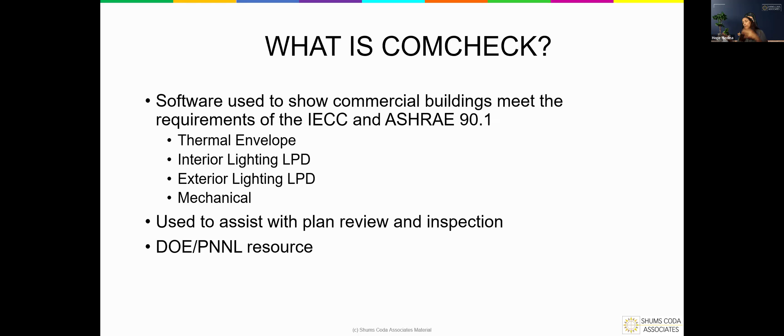If our codes are not more energy efficient with each edition, we have the possibility that this particular resource actually goes away for us. So it is important to keep in mind, we have this, it's a great resource to use. Now let's see all the fun and excitement that comes with it. So I don't know if you have ever had the opportunity to go on to COMcheck and just play around in it and see how the software itself works.

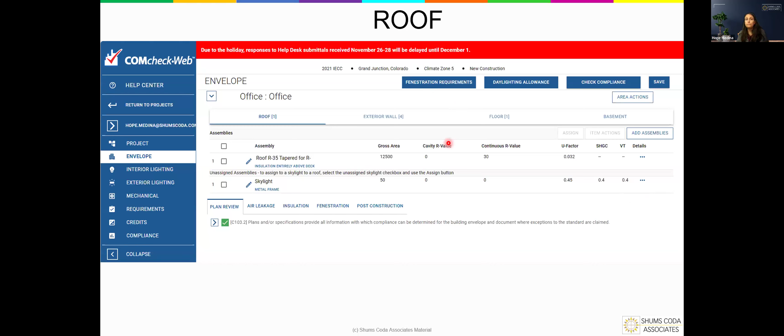So when you are building this, the components that you see on the screen here don't differ from what's required with 90.1 and what's required in the IECC in this particular instance. So here is what our roof components are that are going into the report. And if we come here, here is our exterior walls. It's telling us it's going to be a metal frame, 16 inches on center. There's 6,000 square feet gross area of it. It's going to contain an R20 cavity and a 7.5 continuous.

And then you'll notice that right below it, it has a window, but it has this notation right here where it's a little arrow. And what that arrow means is in the software itself, you assigned that window to be located in that exterior wall. And so the windows happen to be vinyl fiberglass frame. It's got 384 gross area. It's got a U factor of 0.32, solar heat gain of 0.25, visible transmittance of 0.4, and a projection factor of 0.2. This is one of those times that, when we talk about projection factor, the information can be placed here in the report.

And the same can be said for the entrance door. This is an entrance door that's glazing. It's over 50%. So it has this input, whereas the door below it is not a glazing fenestration door. It's an opaque door. And so it has different criteria that it's going to input there.

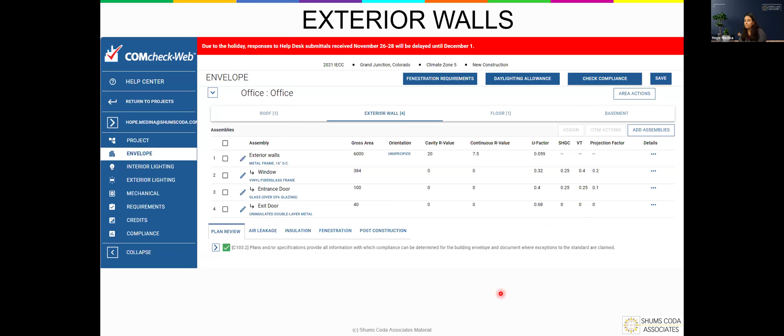All right, then we have our floor. Our floor happens to be slab on grade. It's an unheated floor. In this particular instance, you'll notice it has gross area / slab perimeter, because when we do our slab edge insulation, it's not done by the gross area. It's done by the linear feet, and the slab perimeter is how they're trying to capture that linear feet concept. And then we have a depth of 3 feet on that.

Now, when everything is culminated with what is put into the software, this is what our report looks like. So as you can see, here's our roof, how it was labeled. If we went back and looked at how it was entered into the software, it says R35 tapered for an R30 average. Wonderful. That makes it very clear. And then to ensure that it's correct, where the continuous insulation R value is, it specifies R30, which is what it had to be for that area weighted average. It wouldn't show an R35 because that's not the average they're trying to get to. That's their starting off point.

Then we have our floor. So we know that we have our R10 continuous insulation. Our 3 feet is located over on this side. Our exterior walls, we have that R20 cavity, 7.5 continuous. This is what our design gives us.

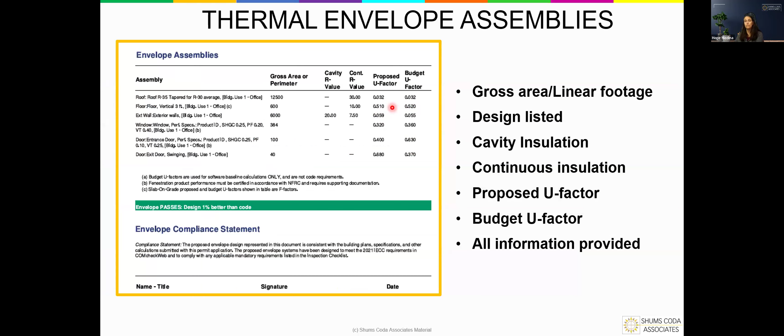All right, so jumping back to our interior lighting fixtures. In this particular instance, it's a lot of fun trying to get this to work. But you go in, you talk about your office. You say, this is what we have. You get to put in the software the area part. You're going to say, oh, it was 12,500. And then it tells you what your wattage per square foot allowance is out of the table.

So because in this option, it's the building area, it's an office, utilizing the percentages here, the 12,500 multiplied by the 0.64. In the space by space option, it says that you are allowed 7,625. If you're using the building area method, it's saying that you have the ability to go all the way up to 8,000.

Now, if we look at this lower part right here, we're saying that the office is a completely open office, so it's not broken up by rooms or anything of that nature. And so the space is 12,500. It says the lighting power density is a 0.61. And then these are the lights that are going to go into that space. So this is like the overarching space, and then you start talking about the different types of lights that are going into that space.

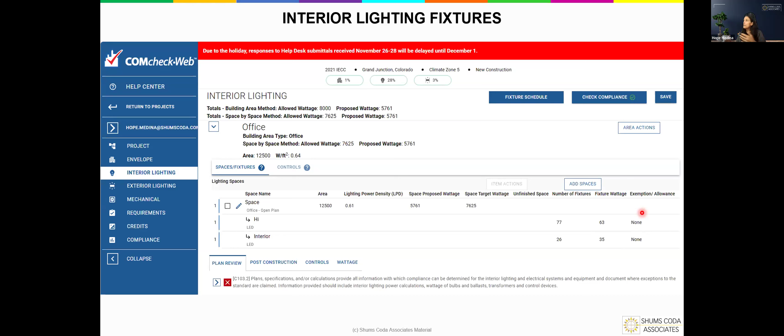And the high fixtures have a wattage of 63. The interior has a wattage of 35. And then there's a portion that you get to click on that says, is this an exemption? Because there are some exemptions that are permitted, such as maybe you have lighting highlighting the national flag. That's exempt from the requirements, or artwork. That lighting is exempt from having to be included in lighting power density. So there's some exemptions that you get to click on and utilize.

So our high lighting is 77 fixtures, and the watts for each of those 77 fixtures is 63. So when we multiply that, that gives us the 4,851. And our interior lighting, 26 of them, has a wattage of 35. That gives us 910. So our total is 5,761. So this would pass because this number is less than the maximum amount of lighting power density we were permitted by the code.

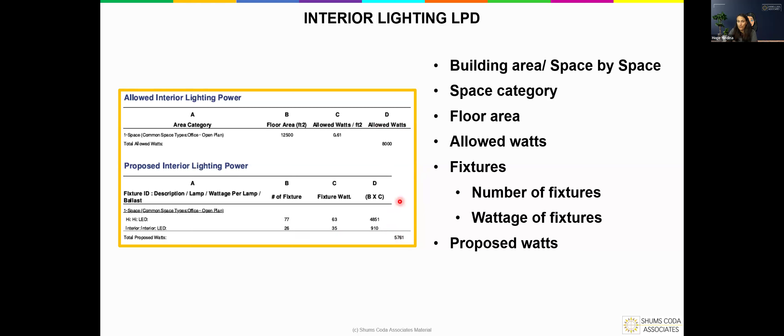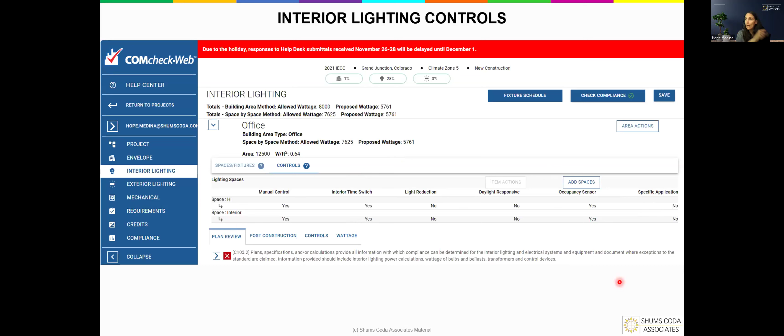Now you'll notice all the software says is yes, it's there, or no, it's not included in the design. The COMcheck report is not saying that it meets the criteria of the energy code, because we're not specific enough that this light is located in this space under this condition, so it needs to have this control. COMcheck can't do that, but below your allowed wattage and proposed wattage, it has your proposed interior lighting controls. For these two fixtures, these are the lighting controls that could be included.

So this gives you an extra tool that you can take to your plans and say, okay, COMcheck says that we have these three controls that are going to be installed. And then you can look at the plans and say, yes, they have these three controls being installed, and it does work. Again, this green bar down here is about the interior lighting and not whether or not the lighting controls pass.

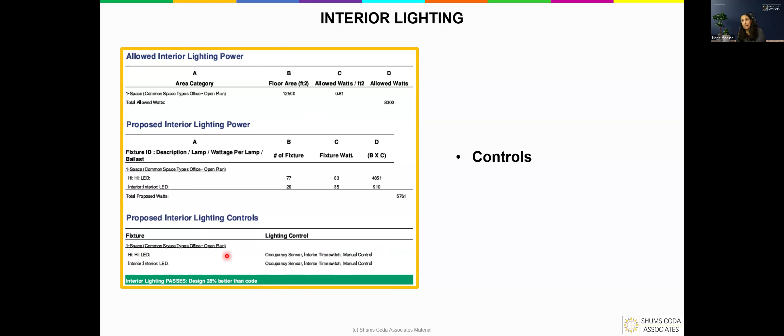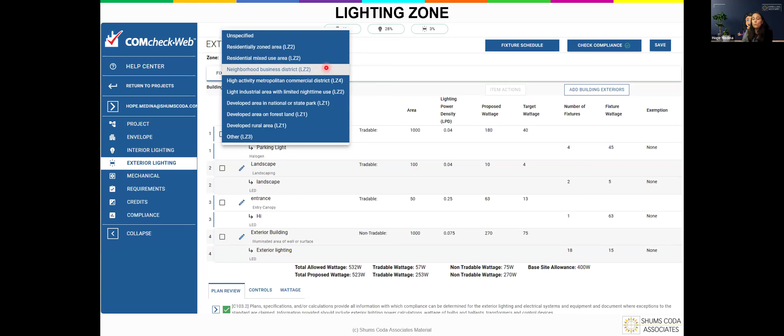And as you can see here, we're saying that this is going into a neighborhood business district, which happens to be lighting zone 2. And if we come over here, oh, this is the wrong, oh no, there it is. It shows me that we picked neighborhood business district, lighting zone 2. Anybody know why that's important to know?

Well, it's important to know because that really determines how much lighting you're allowed to have and whether you fall under certain parameters that you get to have some extra lighting that goes into all of that, or if your lighting is reduced with it. So lighting zone is incredibly important to know.

The next part of this is, okay, just like the interior lighting, we are specifying the locations that the lighting's going to be in and what that lighting is that's going to be in the location. So when we talk about exterior lighting, there are a lot of categories in that table. So in this particular design, we've got lighting for the parking lot, we've got lighting for the landscaping, we've got lighting at the entrance, and then we have exterior building lighting. And within each of these spaces, we have the lighting that is associated with it. And again, you get to call the lighting whatever you want to call it.

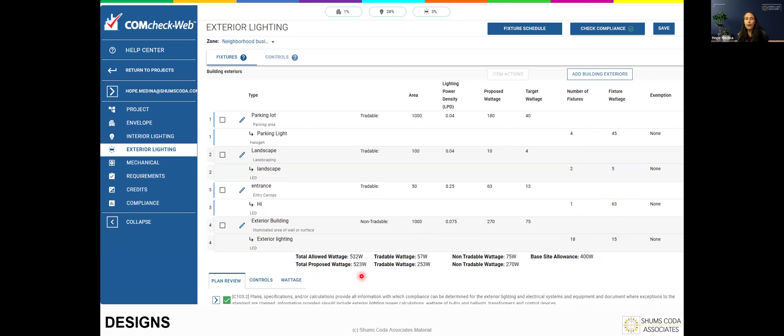The exterior building has exterior lighting LEDs. There's 18 of them. It's got 15, and those are the numbers there. And if you notice down here at the bottom, it starts giving you wattages depending on the whole category of things. And so here is the report as it's broken down. So you'll notice that it includes the 4 categories. It also includes the areas for it. This is the amount of watts that are permitted per what is in the code book. It also talks about tradable wattage. That's not really something that's looked at anymore. There used to be trading available.

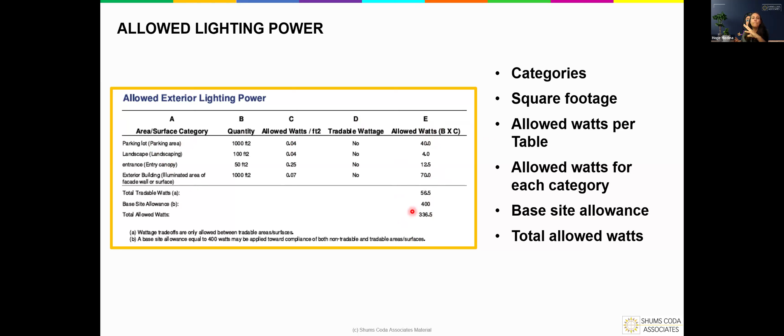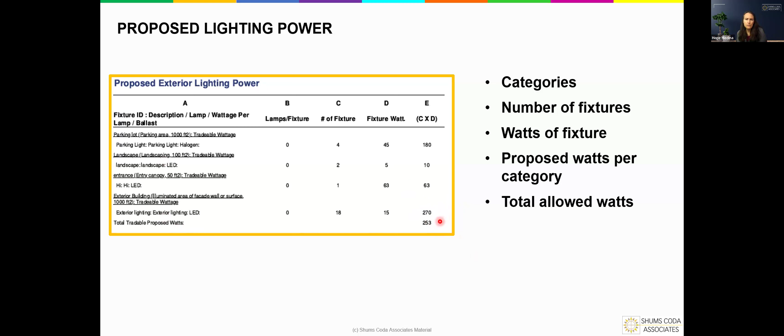And then ultimately, when you do the math with B and C, it's the total watts for each of these categories of lighting. And then here is the ultimate total of lighting that is available here. Now, the part below that is the proposed lighting, because it gives you, here's what you're permitted, and then below that is the category of this is what we would like to do. And in showing what we would like to do, it has the green bar or the red bar that tells us yay or nay on it. And you can see here that our wattage that we have is giving us that 270 here. That doesn't seem right. I'll have to look at that in a minute. Sorry.

Also, there are controls that are required when it comes to that exterior lighting criteria. It's just like the interior lighting controls. It's saying, okay, yes, it has this one, or no, it doesn't have that one. Not that it necessarily is complying with what the code is, but in this area is where they're saying we're going to put these types of controls on these types of lighting. You still would need to verify it on the plans that it has it, but it does call out the type of controls that they're intending to have placed on parking lot lighting and landscaping and entrance and the exterior building lights.

Now let's take a look at the mechanical systems, right? So in the mechanical system, this compliance report is so incredibly important and provides us with so much information to really assist us in demonstrating compliance, because the reality is that out of the code book, 403 is probably the least utilized and maybe the least understandable section of the energy code. Unless you've been dealing in the mechanical systems, then it probably makes a lot of sense. But if you're coming from not having a mechanical background, this report actually really helps in the navigation, and it helps you to get a better understanding of what they're calling out for. And maybe it's just helping us dive into C403 a lot more.

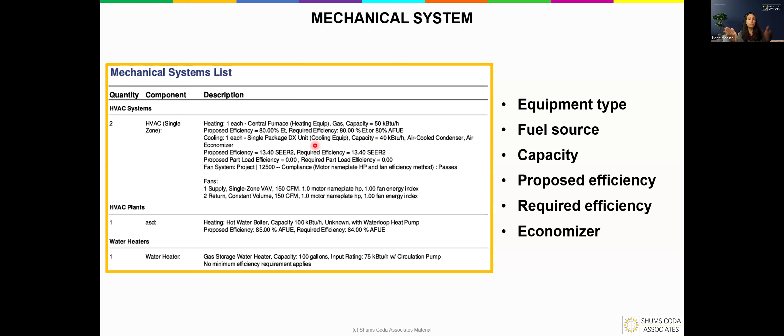Now, the next thing is dealing with those fan systems. And there's a lot of criteria. And this section, again, is incredibly confusing to people who may not have been in the mechanical world, trying to read it and trying to digest it. And how do I know if that's correct on the plans? Well, don't worry. Mechanical COMcheck has you covered in this. It's so wonderful. So in the software, it comes in here because there are two options of compliance paths, right? You can go with the motor nameplate horsepower, or you can go with the brake horsepower.

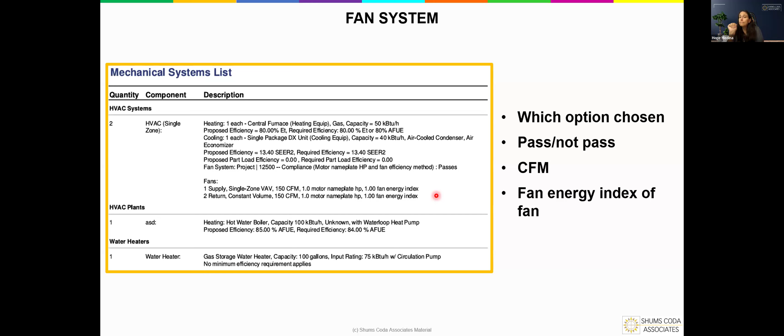It tells you the areas that are served. It gives you information as to, in this particular instance, the supply side, the return side, and their fan efficiency index, a requirement out of the code. And then if we come down here, here is where it happens to be located, and it gives us information, right? I know it's a VAV system. Wonderful. It has a fan efficiency rate of 1. And then, like I said, the report, if anything was wrong with it, there's this little highlighted bar. It's not strong red, it's just a light red. And it says, hey, fan efficiency doesn't meet criteria, or whatever the case may be. And that lets us know, all right, we need to go back and fix this.

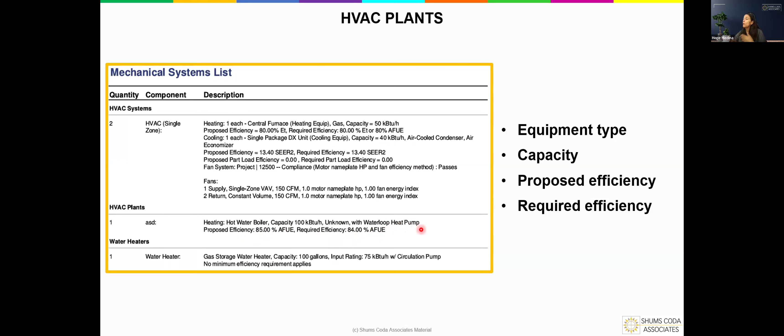All right, so let's say they're not going to utilize a forced air system. There is an option in here called plants, and it gives us information if we were going to use a boiler for the system. And so this boiler, it gives us information down here, right? We labeled it as ASD. It's heating. It's a hot water boiler. It's giving us what our capacity is. It was 100,000 BTUs. What's listed as unknown here? Oh, the path. And then it says it's with a water loop heat pump. Its proposed efficiency is 85% AFUE, and then the required efficiency is 84. So it's a little bit better than the minimum requirement. And so wonderful. Look at that. Boilers gave us the information that we needed to have.

Now, something that isn't always provided, but if you have equipment that's going to be heating water for service water heating, right? So that we have hot showers or whatever the case may be. There's a tab here to address it. So you would put the type of system that's going in there, how many you're doing, what capacity it's going to have, what the fuel source is. Again, really important to know so that we have that matching up with everything. What the input rate is, is there any additional equipment to it, such as, does it have a circulation pump? Is it part of the loop? That would go into that additional equipment. It's a drop down, they click it, and there it is. And then whatever the proposed efficiency is, and then what the required efficiency happens to be.

In the code books from 21 and older codes, the requirement for the water heating efficiency hasn't been maybe as robust. Under the 24, it gets a little bit more robust. And if you notice, even when you go into the section in the 21 and earlier, the equation that's in there, it's kind of hard to figure out, right?

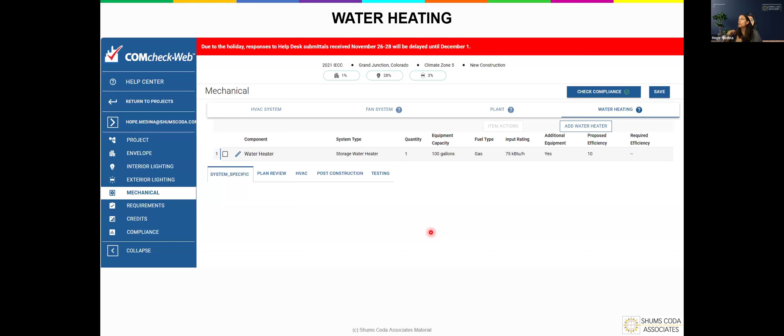But ultimately, as you can see down here at the bottom, it's telling us it's a gas storage water heater. The capacity is that 100 gallons. It also tells us what's our input rating. That's that 75 kBTUs. Now, remember here, it said additional equipment. It says yes here. Here's where it shows up.

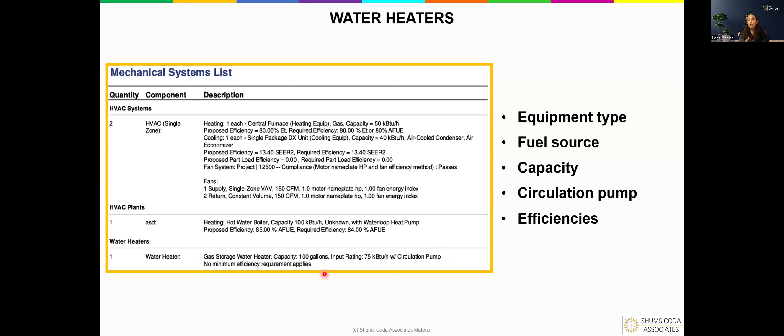Okay, circulation pump. So that additional equipment that's being installed with it that you capture is showing that circulation pump for it. And then we have where it demonstrates that there is no actual minimum efficiency requirement for this type of equipment out of the code book in this instance. All right.

So again, we're looking at the additional efficiency credits. Now, what I'm going to preface this with is the information that we are talking about will be the 2021 version of what the additional efficiency credits are. I was a little worried time-wise on it, and since most of us are probably around the 21 a little bit more. But as we know, in the 24 the credits changed drastically. Instead of the one credit, we have two credit requirements. And so for that, it's a little bit different, but this gives you at least an idea of how it works.

So in this particular instance, the additional efficiency credit that they went with was the reduced lighting power, because remember, you have to get 10 credits. This happened to be one that got them 22 credits. Anybody know why they got 22 credits as opposed to just the number that's in the table?

So for the reduced lighting power option out of the additional efficiency credits, when you are 15% better than what the base code is, at that point you get to do an equation, and the equation determines how many points you actually get. So if you're really, really efficient with your lighting, I've seen reports come in that say they have 80 additional efficiency credits from it, because they are so energy efficient with their lighting that they get to take all that credit for it.

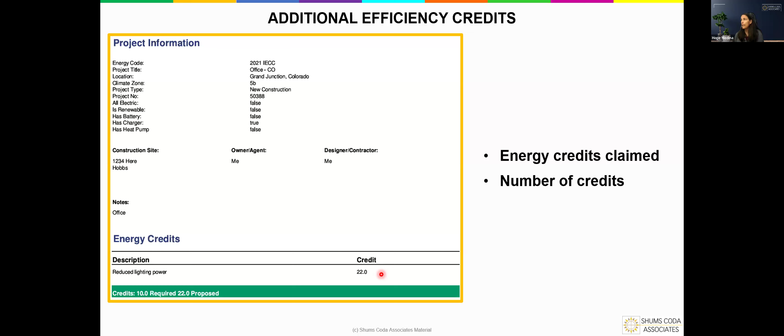Now, this goes out to all of my designers who are in here. Please take the time. You might think it's very tedious, and it can be, don't get me wrong. But these tabs that we have here, and clicking on saying, yes, it is a part of the plan, yes, I am saying that it meets the criteria. And in certain instances, such as if you were clicking on the installation, it gives you the opportunity to fill it out. But the information that gets clicked here translates over onto this inspection checklist.

The inspection checklist is kind of misleading, because you can use it for plan review as your plan review checklist, and you can also use it as an inspection checklist out in the field. So in this instance, they clicked that C103.2, they clicked the button saying, yes, this is compliant with it. There's also a drop-down menu, like I said, that you can fill out. And when you fill it out, you can say things like, the location for this information is on sheet A1.

I will tell you, if you took the time, and it's not a lot of time to do this, to tell the plans examiner exactly what sheet this is on, if I have my choice where I know a plan is going to take me 7 hours to do, or, there you go, Justin, I have something like this that's going to reduce my time by half.

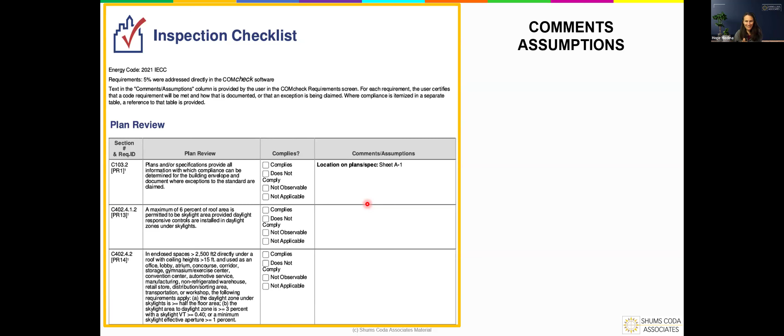I'm going to pick the one that's going to make it easier for me and get that one out, done, out of the way, because I know that the more difficult, less plan reviewer friendly one is going to take more time for me.

It's great to get it on paper, but if we're not getting it out into the field, this is where we can help everyone, including the contractors and the inspectors out in the field, to actually manifest what we have designed.

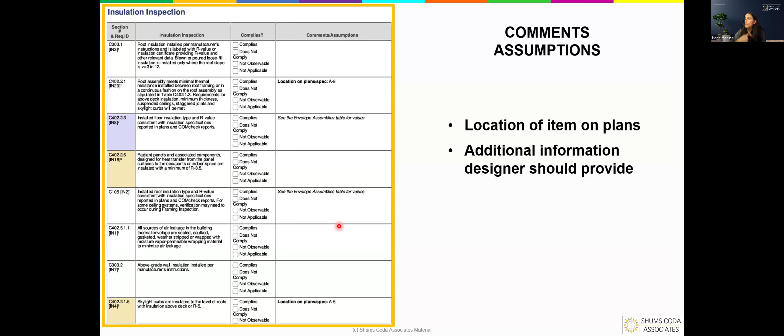Oh yeah, Brian, that's a great comment that the inspection checklist is a good way to cross coordinate between the architect who may be filling out the envelope portion and the engineers who may be filling out the electrical and mechanical. It's absolutely right. I like the idea of that cross communication. And I would say it's also cross communication for the plans examiner and the inspector too, making sure everybody's on the same page for all of this.

But more importantly, what it shows is different colors within this portion right here. So when you see those colors, it's letting us know whether this measure is going to have a high impact on energy efficiency, a medium impact, or a low impact. And this is not a one size fits all comment here. In this instance, for an office, the slab edge insulation had a medium impact.

Whereas if by chance it was a hospital, and only because I couldn't think of another one, maybe the slab edge insulation has more of an impact. So that box may be white in that instance. So it's not that the boxes are always purple for slab edge insulation. The box is purple for this office in this design because it has a medium impact. Makes sense to everyone?